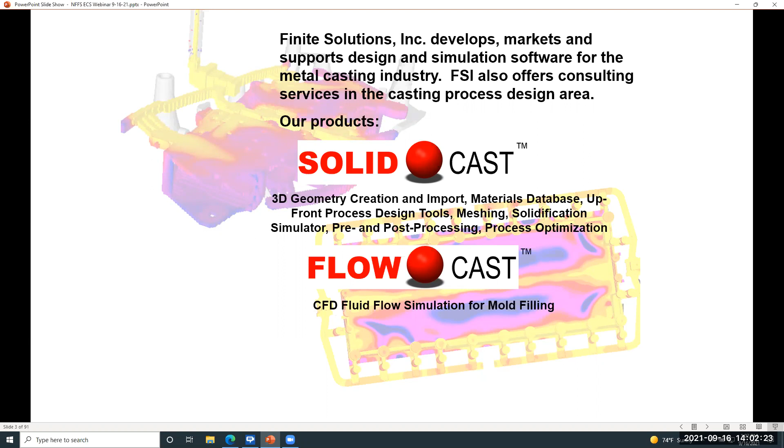Finite Solutions has been around for quite a while. Actually, we were the first company to commercially provide PC-based simulation tools. This slide shows a few of our company milestones. We started simulation in 1985. That was in the days of the MS-DOS operating system. At that time, I was employed by the American Foundrymen's Society, and Larry Smiley, who is the president of Finite Solutions, worked in the foundry industry at Reliable Castings, where he developed the world's first simulation tool.

It started as a 2D program and was expanded to 3 dimensions in 1992. And as you can see, the various dates, things moved forward. We started in 2D, moved to 3D, went from DOS to Windows, and added more and more features and capabilities, starting with solidification, adding fluid flow analysis, and then also process optimization. We continue to not only develop, but expand the use of the software. So there's many, many more features now than there were originally. And of course, with computers getting more and more powerful, the things that we can do with simulation, we didn't even dream of being able to do back in 1985.

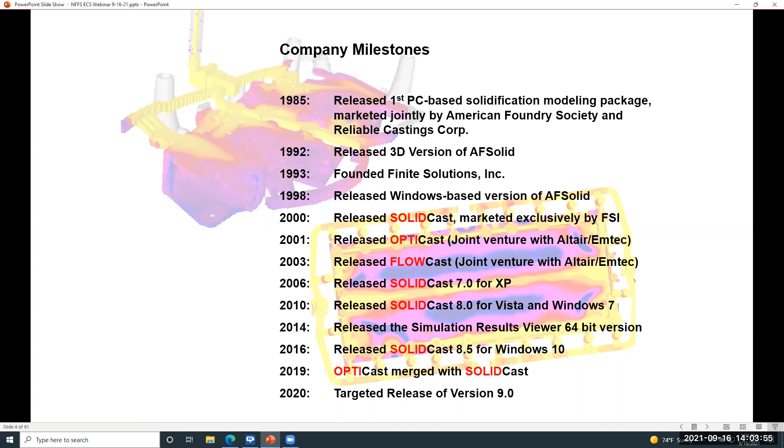There's actually 3 pieces to the software that we'll be discussing. SOLIDcast is the main module or the main system that includes model building, the databases of materials, both casting alloys and mold materials, the filling process, solidification simulation, and predictions of porosity.

FLOWcast adds true flow modeling, which is based on a tool called CFD, or computational fluid dynamics. This allows us to simulate in great detail the mold filling process and the prediction of defects related to that filling process. It also provides the most realistic and accurate temperature distribution due to filling, which in turn improves the solidification analysis. And finally, optimization is a tool that can be used to fine-tune your rigging design. Normally, this is done to obtain the maximum process yield while still guaranteeing casting quality.

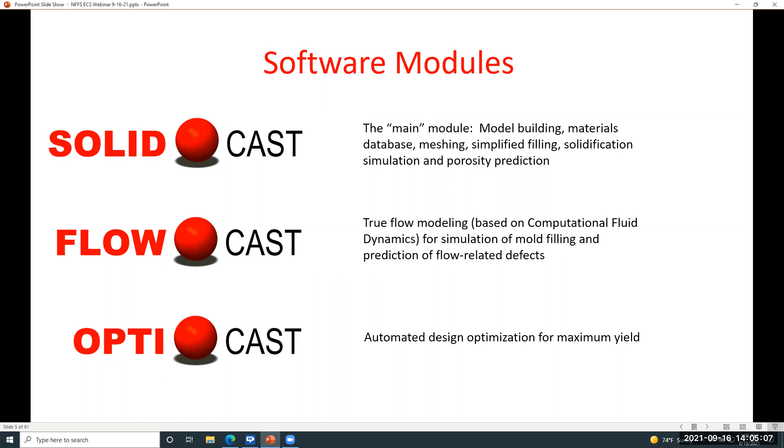When we talk about casting process design, we need to look at what the goals are. In other words, what do we want to do when we're working with process design as done by simulation? And of course, the first answer, the most obvious answer, is to make good castings. We would like to do that as efficiently as possible and as quickly as possible. Simulation is just estimating or predicting what's going to happen on the shop floor. By doing it on the computer, we are hopefully saving time, money, and doing things more reproducibly from one casting to another.

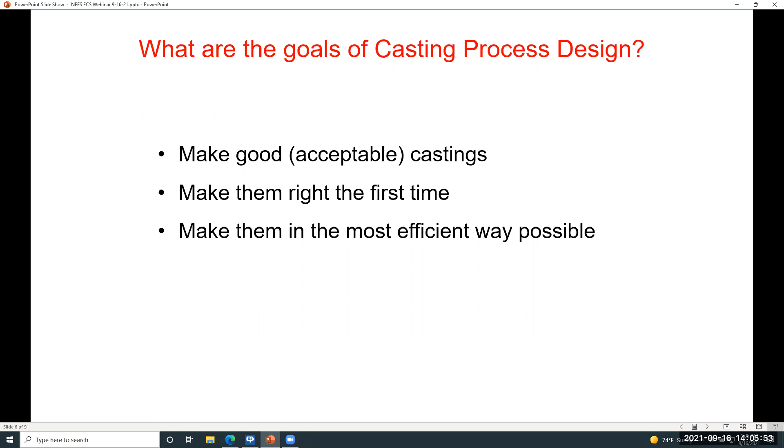When we look at process design, we can break it into 4 pieces. We can start out with the customer specifications and data. That would be things like a blueprint or a CAD model, as well as process details. We then come up with the initial design concepts. How are we going to rig this part? How are we going to gate it and riser it? The third step is verification through simulation or through shop floor trials that show that the rigging design we've come up with will work acceptably. And then finally, design optimization, where we can take that rigging system, fine tune it so that we can get the highest process yields while still guaranteeing our level of casting quality.

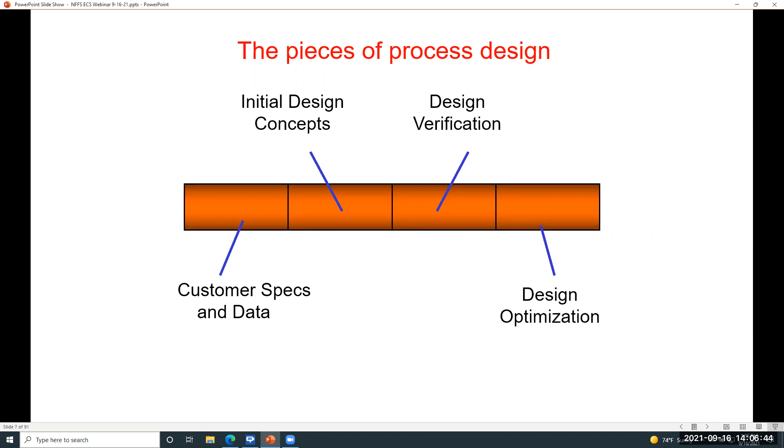Let's take a look at these pieces and see how they fit in with the software. For customer specs and data, we work with the SOLIDcast system, and this is done through a CAD import. SOLIDcast uses STL or stereolithography files, which are a very common file format that virtually any 3D CAD system today can provide directly.

The design concepts are created through the riser design wizard and the gating design wizard, which are electronic worksheets within SOLIDcast that allow us to use simulation to help us design the rigging system. That is, we run a simulation of the part without rigging, and these wizards help us to determine a good gating and risering design.

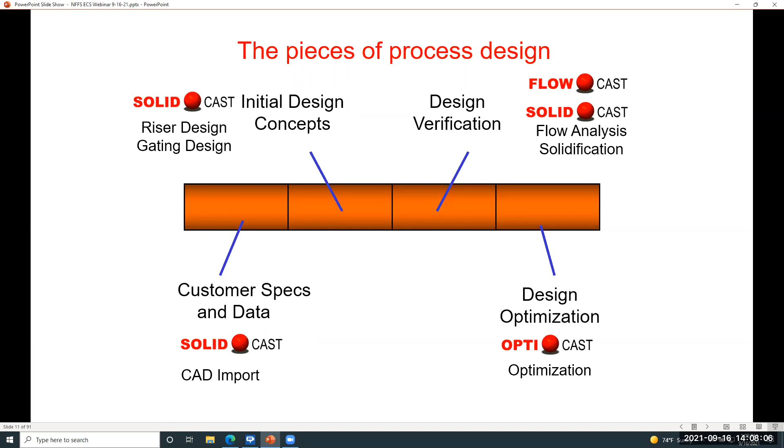Verification of that design is then done using SOLIDcast and FLOWcast so that we can do a fluid flow analysis to check the filling situation, and then SOLIDcast to do a solidification simulation to verify that we're going to make a sound casting. And then finally, optimization can be done using the OPTIcast tool. Let's look at these in a little bit more detail now.

As mentioned with SOLIDcast, the idea is that we have design tools up front so that simulation actually helps us to design a good rigging system, not simply test an existing design. And this is done, first of all, through the use of the riser design wizard, which helps us to find the appropriate location for risers, the appropriate size for the riser, and allows us to test and verify the use of these tools. For example, we could work with a sand riser, we could work with a sleeved riser. There's a lot of different options there, and the riser design wizard takes us through that process.

The traditional approach to riser design is commonly called the modulus approach or the modulus method. The modulus is simply the volume of the casting divided by the surface area. Now, that could be of the full casting, or it could be for different parts of the casting. And this was really a concept that was developed almost 100 years ago. The idea behind it was that the volume represents the heat or the energy that needs to be removed in order to get solidification to occur, and the surface area is where that heat goes.

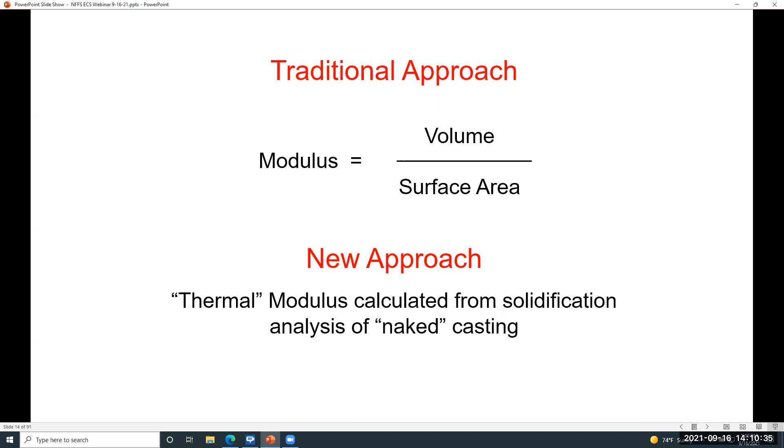However, in the computer age, we can do a lot better than that. We can calculate what we call a thermal modulus or an effective modulus, which is based on an actual solidification analysis based on the actual properties of the casting alloy and the mold materials in question. This gives us a more accurate analysis and thereby allows us to go back and do a more accurate riser design.

In the same way, we have a gating design wizard, which allows us to calculate all the pieces needed for a gating system: sprue size, runner size, gate size, and these are calculated in order to achieve what we call an optimum filling time. Again, that is calculated by the system, and we can make choices, and the system will go through and calculate appropriate sizes of all the components of the gating system.

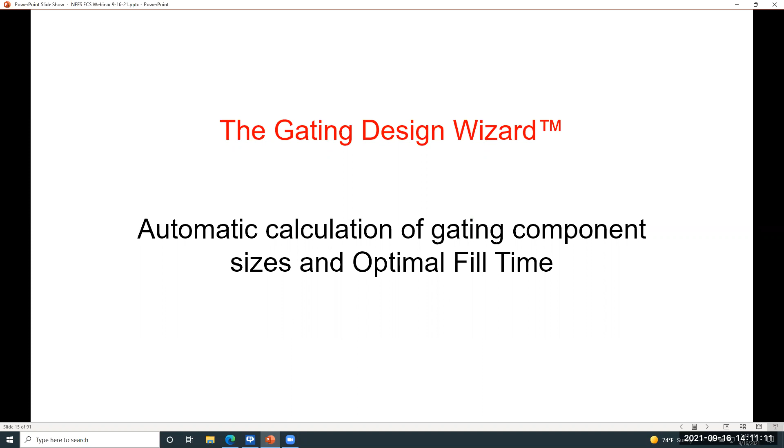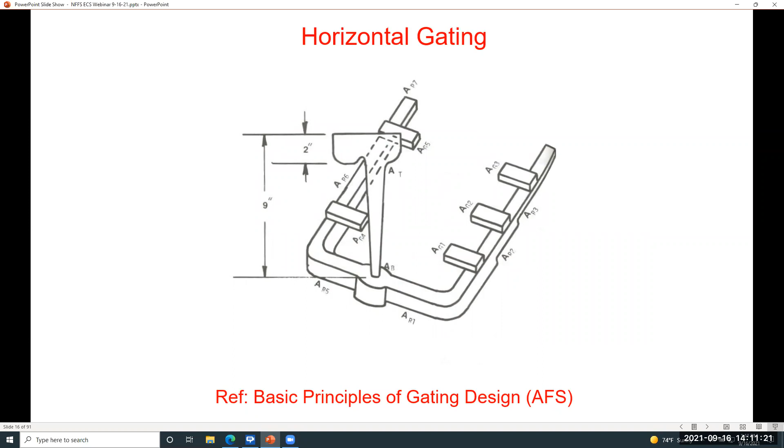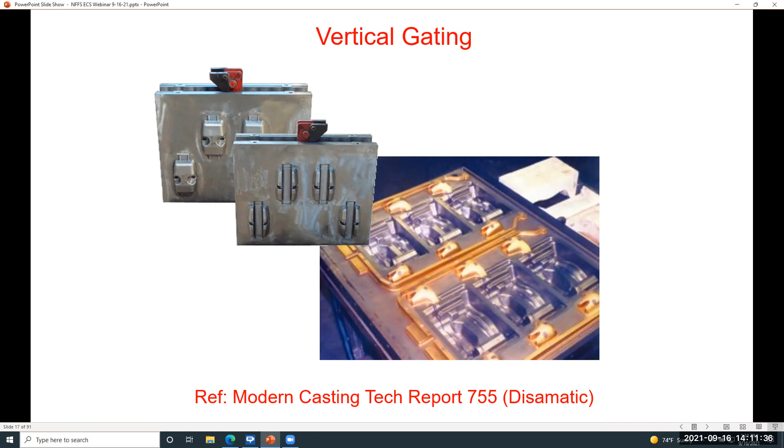We can work with horizontally parted molds, and this is a schematic taken from the AFS book, Principles of Gating Design. And we can also work with vertically parted molds, such as you'd have on a DISAMATIC molding machine. Incidentally, a lot of the principles for gating and riser design can be applied to the investment casting process and the permanent mold process as well.

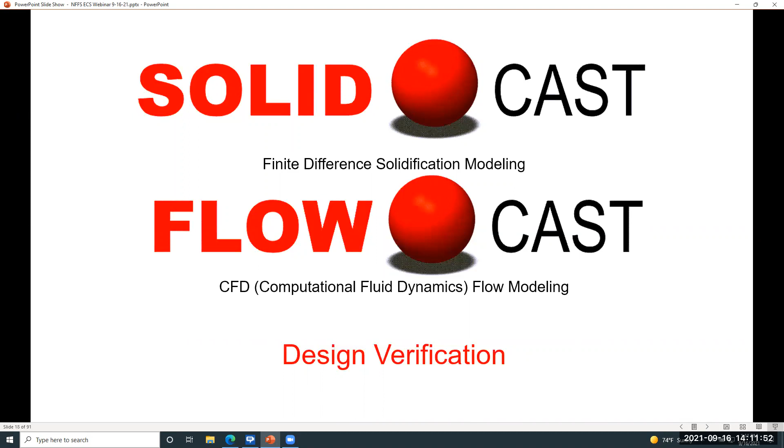So once we've designed our system using the wizards, we can then use SOLIDcast and FLOWcast to verify or to test that design. And then finally, if we wish, we can optimize that design, fine-tuning it to get the highest yield possible.

Let's now look at the actual steps in simulation. We start off with materials. What's our casting alloy? What's our mold material? What is our molding methodology? That is, are we doing sand casting? Are we doing investment casting or permanent mold casting? In each of these situations, we have different ways to set up a simulation to accurately model the system.

The second step is to create a three-dimensional model. Generally, the simplest way to do this is to get a CAD file from your customer. Again, our initial simulation will be without rigging, so model building normally only takes a few seconds. That is, import an STL file, tell the system what the alloy is and what the mold material is, and go on to do the simulation.

Of course, when we add things to that model, the rigging, the risering, the gating, perhaps the use of chills or other materials, those can be created either in CAD or in many cases can be done within SOLIDcast as well.

The simulation itself is not actually run on a CAD model. It's run on what we call a mesh. In SOLIDcast, we break the model down into a series of cubes, which we call nodes. And this may be a few 100,000 cubes to many millions of nodes, depending on the size of the model and the complexity of the shapes. The meshing process is done in an automatic fashion. We set a few parameters and the meshing takes place automatically.

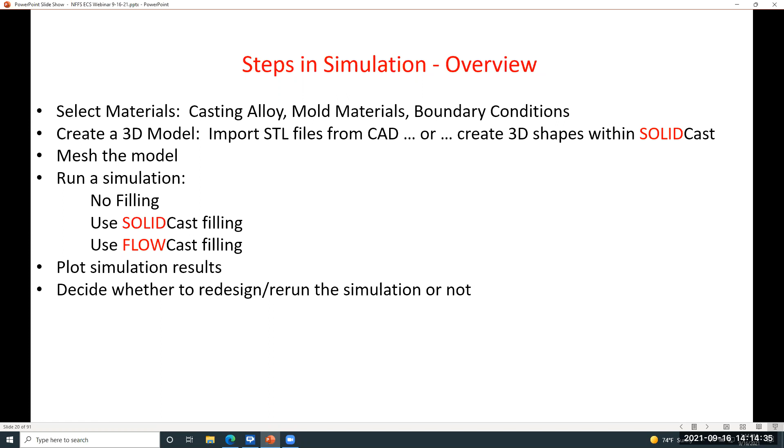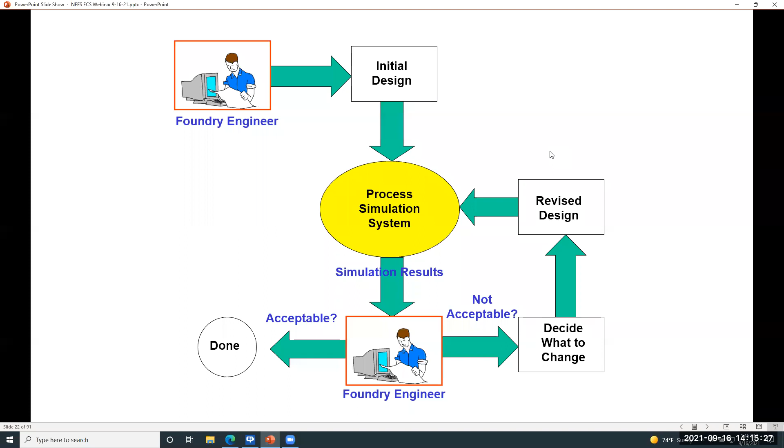The current way we do this, or the manual way we work at this process, is shown in this schematic. We start with the foundry engineer who looks at drawings or CAD files, comes up with an initial design, and then we run that through simulation to see did we make a good casting or not. If we look down at the bottom of the screen, then we can see that once again, the foundry engineer is involved deciding whether things are good or bad. If things are not acceptable, decisions are made on what to change, adjust or revise the design, and then resubmit that to process simulation. Now, this loop may be gone through several times before we get what we would call an acceptable result.

However, we are trying to develop a new paradigm where we can do a lot more in a lot less time. And that is by using the system to help us with the decision-making process. We start with the foundry engineer once again, but in this case, the initial design is run automatically by the system, and then gating and riser design wizards are used to help us with that initial design of the rigging system. That is then submitted to simulation, and now we can either use the foundry engineer to determine whether things are good or not, or we can insert optimization into the process, where the system can automatically determine, was the result of that simulation acceptable, and also to determine what should be changed.

And essentially, it automates this bottom process. So there may be many simulations done, but an operator is not involved once the optimization is begun. And we'll see in a minute how that is done. That allows us to improve our results. Typically, we can get yield improvements in the order of anywhere from, say, 5 to 15%, and yet have less time involved with the simulation process itself.

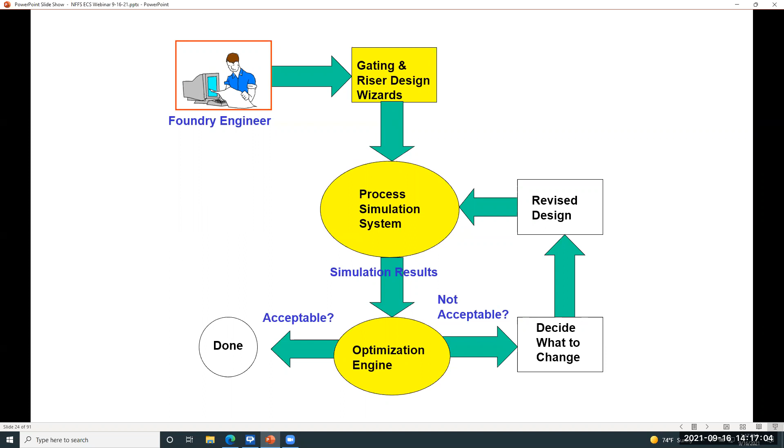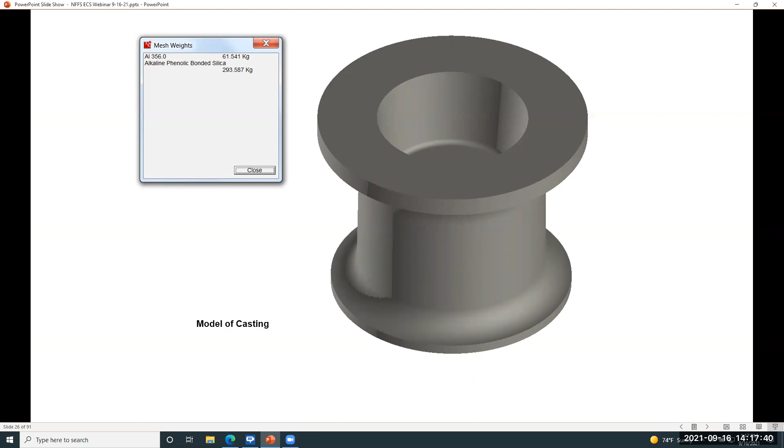When we run a simulation, we tell the software, what is our casting alloy? That is simply selecting the material out of a database. And what is our mold material? Again, typically we're just selecting the material out of the database. In the case of sand castings, we can have various binder processes. So we could have, say, a green sand mold, we could have a phenolic urethane binder, any number of things there. And we pull that data just by checking an entry on a box in the database. In the case of the casting material, we're normally adjusting the pouring temperature for the particular process we're working with as well.

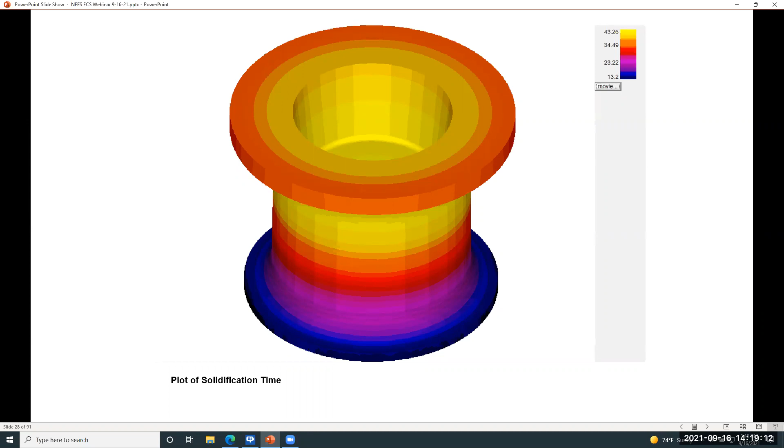Setting up and running this initial simulation normally only takes a minute or two, and running of the simulation itself, depending on what PC you have and the complexity of the model, typically only takes from say 2 or 3 minutes to approximately an hour for a very complex model. This shows a plot of the solidification time, where basically we're looking at the darker colors representing the faster solidification times and the brighter colors, the longer times.

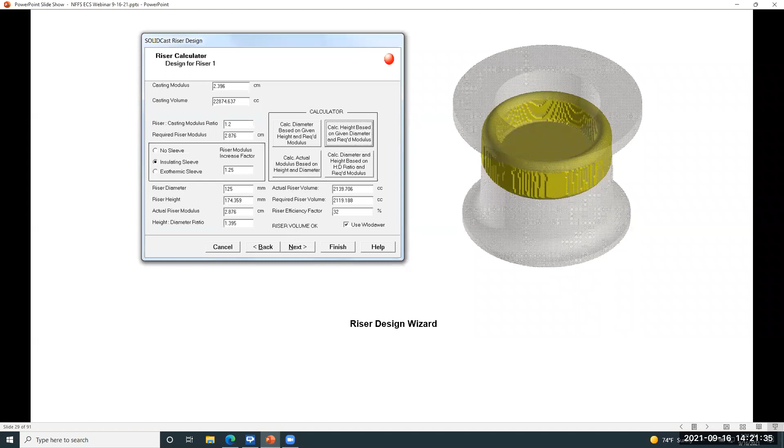So we can calculate the diameter of the riser, the height of the riser, and make sure that the modulus information is greater than the casting modulus, and then our volume information is adequate as well. If any one of these pieces is not satisfied, it will be flagged in the screen, and then you can very quickly go back and make adjustments to see what changes need to be made in order to get an appropriate size riser.

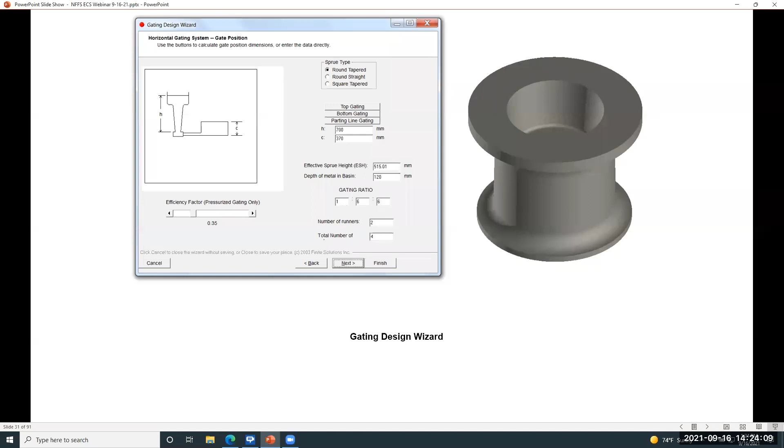We can enter a gating ratio, which is the ratio of the cross-sectional area of the sprue to the runner to the gates. So in this case, we have a 1:6:6 ratio, the sprue being the smallest number. This is what we call an expanding or a non-pressurized system. And then we can set the number of runners and the total number of gates. The system then goes through and calculates all the appropriate dimensions for the sprue, for the runner, and the gates.

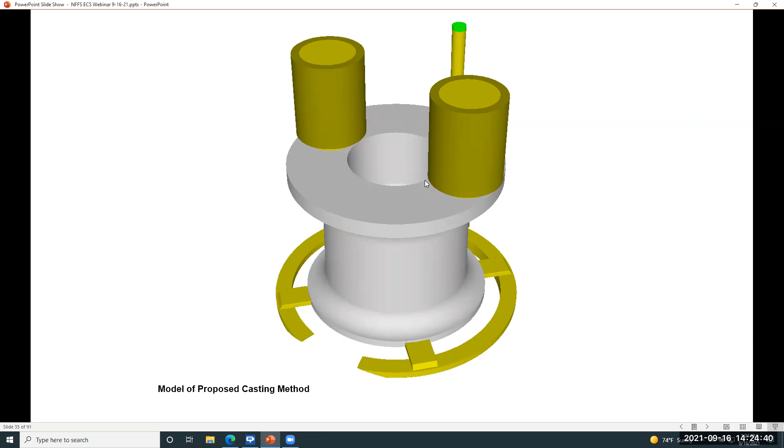This shows what the gating and risering system looks like based on those calculations. We can see that we have top risers here with insulating sleeves. We can see that we have a round tapered sprue. We have a double runner. Incidentally, when we look at the runner, we can see that this is what's known as a step-down runner, which allows equal flow through each gate. You can see after the first gate, the thickness of the runner is reduced. That's so that we maintain a constant cross-sectional area and a constant flow rate through each individual piece of the gating system.

Also notice that we have a green disc on the top of the sprue. That's called fill material. That allows us to run a filling simulation that essentially becomes the source of hot metal into the system. And also, we have a filter down here. SOLIDcast has a utility that will allow you to create ceramic filters. And we actually modeled the flow down the sprue, through the filter, and through the gating system.

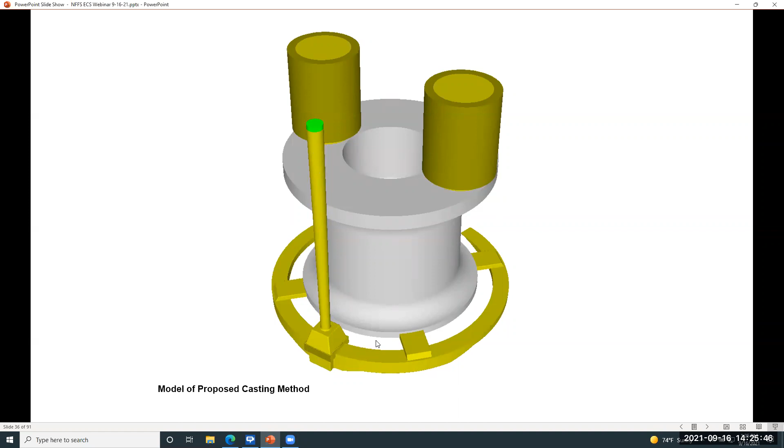This just shows another angled view. And this also shows that we'll be using a chill on the base in the center of the casting. The reason for this is with our initial simulation, we found that we could not get good feeding continuously through from the top riser down into the bottom part of the casting. So we used a chill to freeze off that area quickly and promote directional solidification.

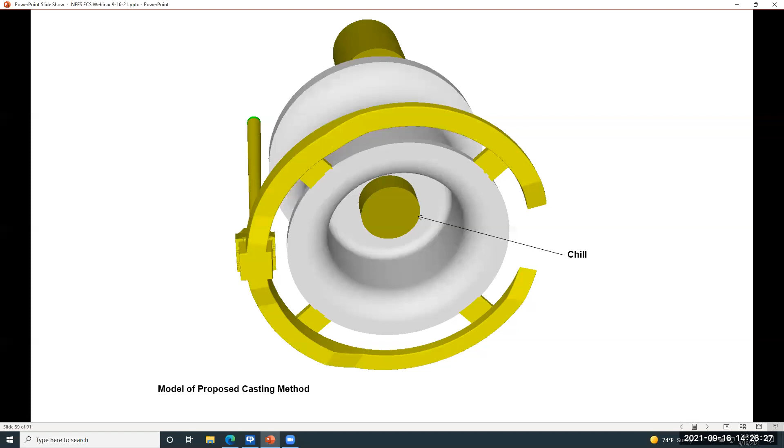Just another view. And here we're going to see a couple of screenshots showing the filling process. This shows a 20% increment. We're looking at the temperatures that are changing during the filling process. And if we broke it down and created a movie, we would be able to see the entire filling process in a smooth, real-time sort of fashion, so that we could see if there's any splashing or formation of areas where gas would be trapped, things like that.

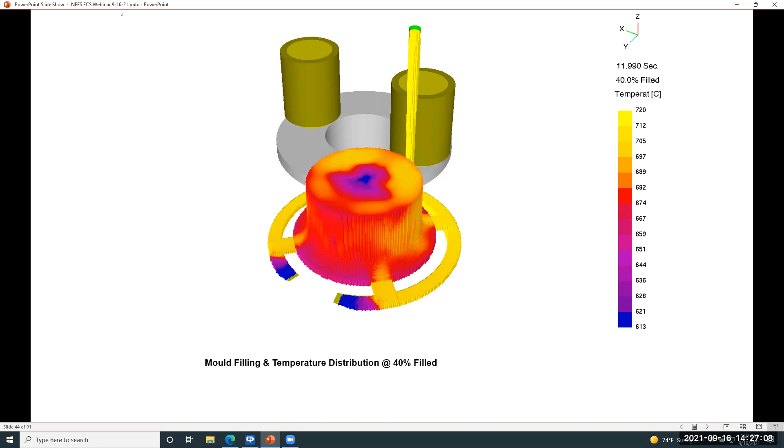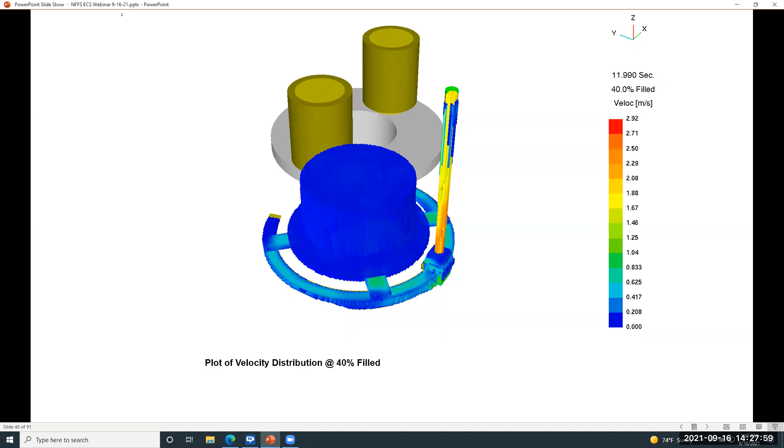Incidentally, when a filling simulation is being done, we can look at the temperatures, we can look at metal velocity, we can also look at pressures. And so this just shows steps through the filling process. This shows metal velocity. We're looking at getting flow of metal in as calmly as possible, especially in the non-ferrous alloys, because they tend to be prone to dross formation and getting oxide mixed up. So we're looking here, we're getting nice, slow metal velocities. So our lower values, the dark and medium blues.

And in this case, we were doing a plot of anywhere where the metal was going faster than 0.5 meters per second. And this is sort of a typical cutoff value. We would like to keep the metal velocities below that, and we can see that we're doing that quite well here. The only area where it's going faster than that is the initial metal down into the sprue.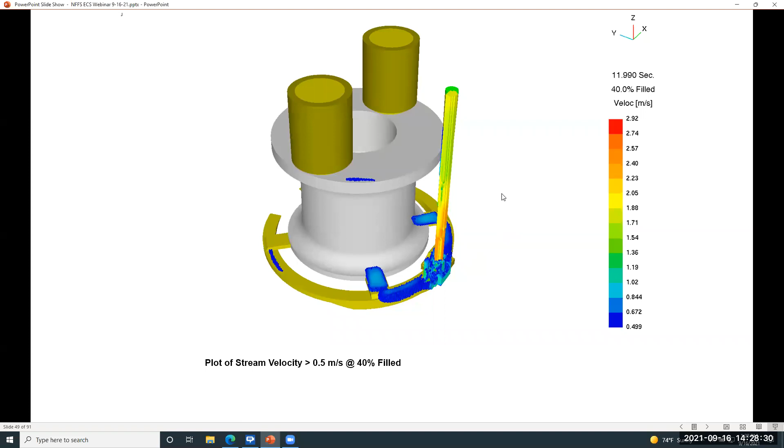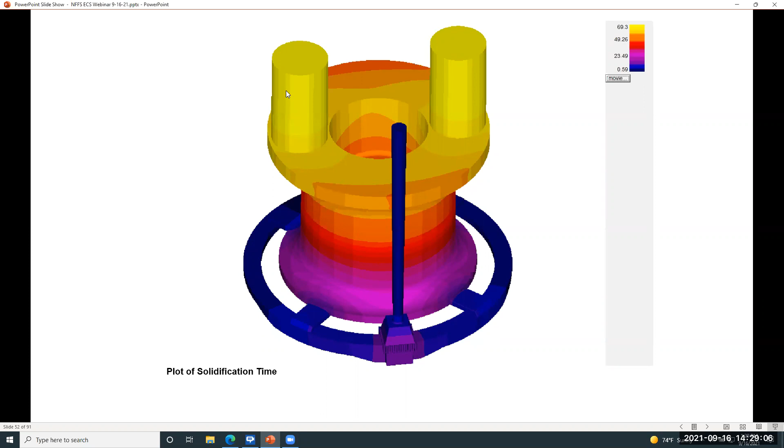If we look at solidification, this is a plot of the temperature distribution at the end of solidification. And this is a plot of solidification time. Generally speaking, we're looking for directional solidification, where we want to see different parts of the casting solidifying in a progression of darker to brighter. And we want to go out so that the last point to solidify is in the riser. That appears to be the case here.

Here we're plotting at 0.95, so it's a higher sensitivity. Anything is shown that has lost more than 5% of its nominal density. 0.99, this is 1%. We can see we're getting a little indication here at the gate connections. And then finally, at a value of 1, this is our highest level of sensitivity. In other words, any loss of metal density will be indicated in the plot.

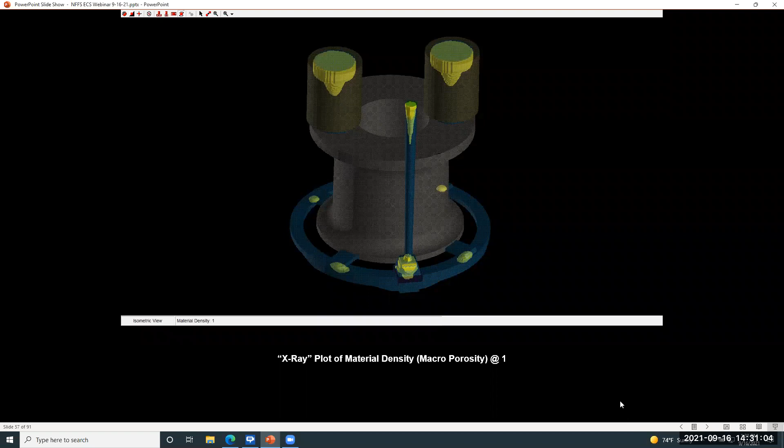So we can see that we have more indications in the sprue. We can see better the piping of the risers, but we can also see that the casting is completely clean. And in fact, if we go from a side view here and rotate the casting so that the sprue and the gating are out of the way, we can see that we have a perfectly sound casting.

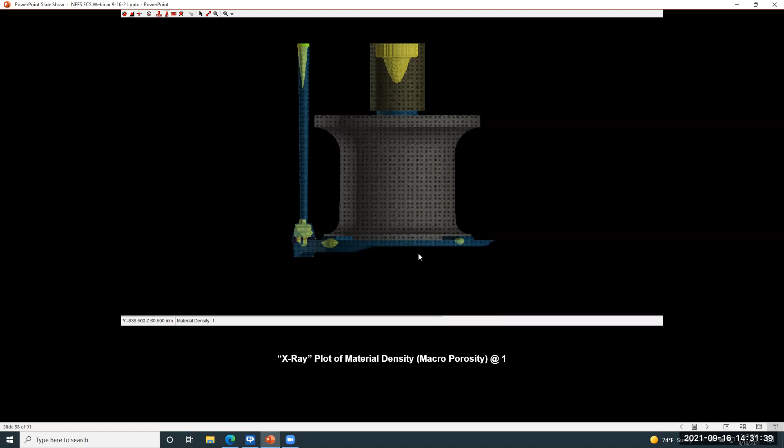So by doing an initial simulation with SOLIDcast, we were able to determine the basic solidification behavior of the part. We were able to calculate appropriate size risering, appropriate size gating, and then by adding those to the model and running a verification simulation, we can see that we're getting a perfectly sound casting first time through, which of course is what we're hoping for. This is just another view from the top.

Just a couple of things showing here. I mentioned after running a first simulation, we weren't getting good feeding all the way through. In other words, the feeding zone was separating out. This shows an example of what I would call an intermediate model. That is, we're not showing an entire gating system, but what we're doing is we're adding the in-gate locations and making them out of fill material. By doing this, we can put hot metal in here without doing a rigorous filling simulation.

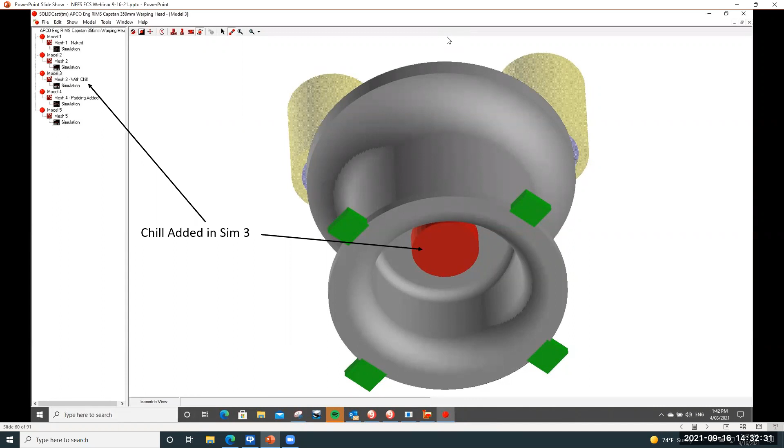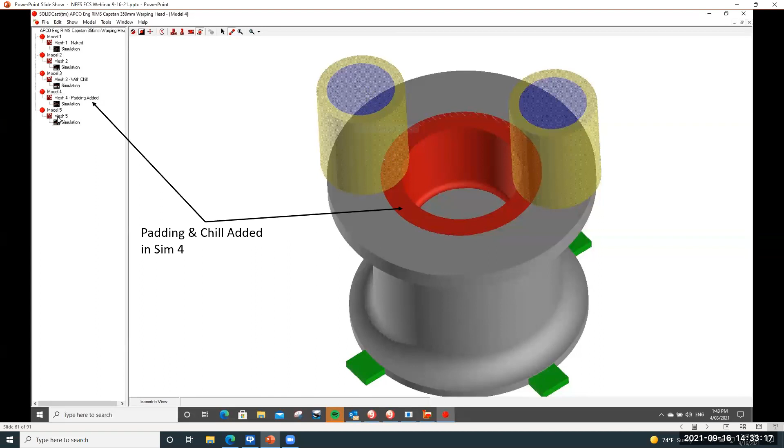That saves us time, but it also gives us a good idea of what's happening with the filling process or the effects of the filling process. After putting in that chill, we still weren't getting complete progression of solidification through. So we actually made an adjustment to the casting geometry by adding a circular pad on the inside, again, doing simplified filling. And we were able to then verify that the risers could then feed through and completely feed the casting.

And then finally, our final simulation, or simulation number 5, that was done with the entire gating system and also done using what's known as a plane of symmetry. You can see here that the casting itself is radially symmetric, but when we add risering and gating, we have a plane of symmetry or a mirror image right down the middle.

The reason we do that in simulation is that allows us to run a simulation twice as fast, yet give us results that are exact. There's no loss of accuracy from this at all. And so if we're lucky enough to have a part where we have symmetry involved, that will allow us to run our simulation that much quicker.

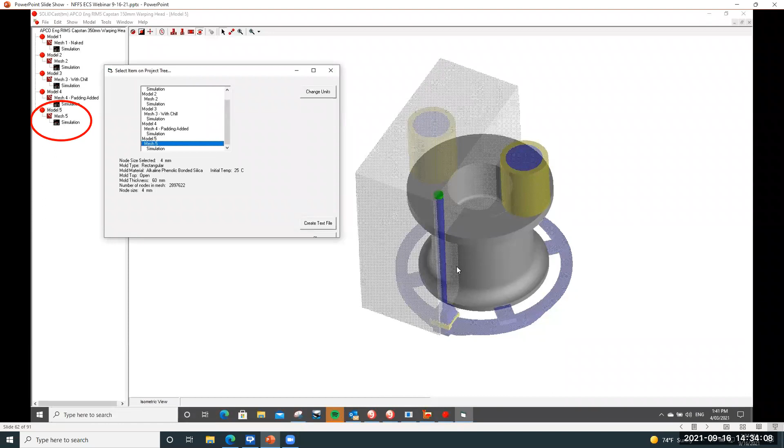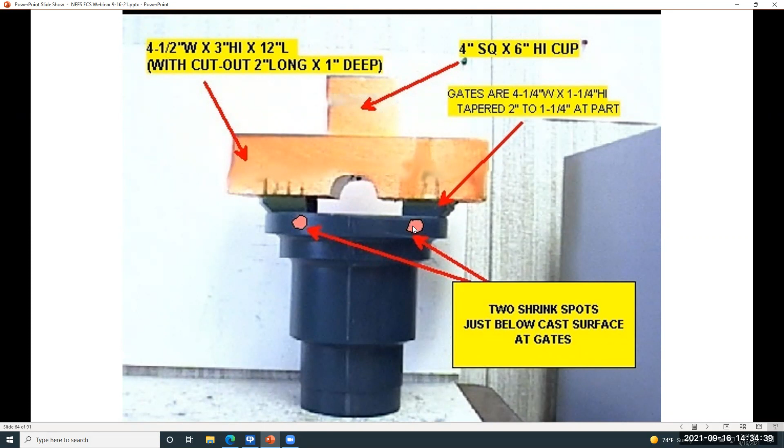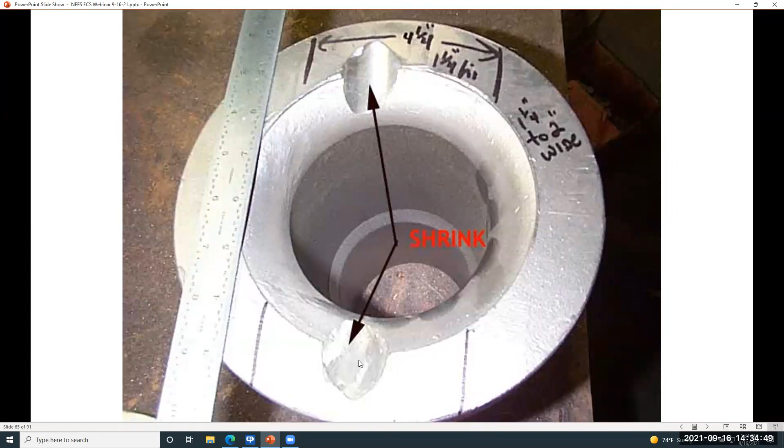Let's take another example, very quick look at adding the idea of optimization to the process. This will be done for an investment casting. This shows the wax pattern, and you can see initially that one of the problems that they were having at the foundry was that they were getting internal shrinkage in the casting below the in-gate. So they were actually gouging out so that you can see the shrink area below the in-gates here.

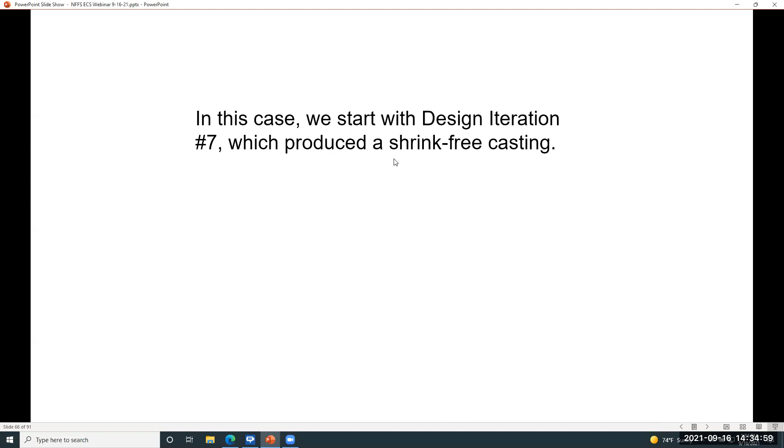Initial simulation was done to make adjustments trying to move that shrinkage out into the gating system. And that was actually done by putting a little wedge underneath the gate to open up the area through there. So this became our starting point, and then added the current gating system into the model so that we can do an optimization. And we can see a couple of things here. We have the casting geometry, the gating system in blue, and fill material at the top in the green. So we're doing a filling simulation with this as well.

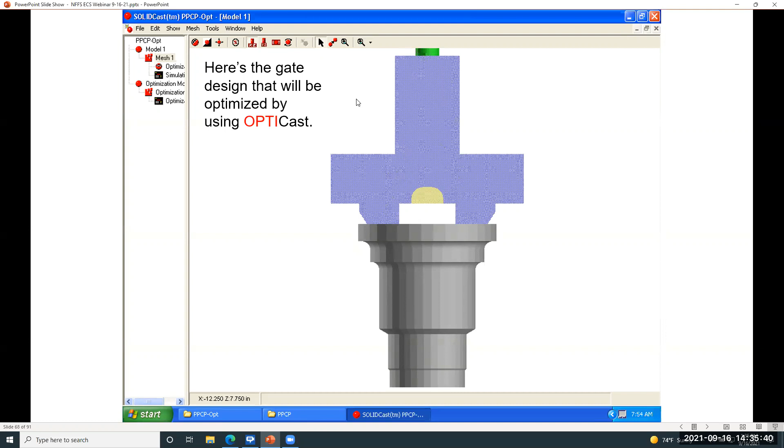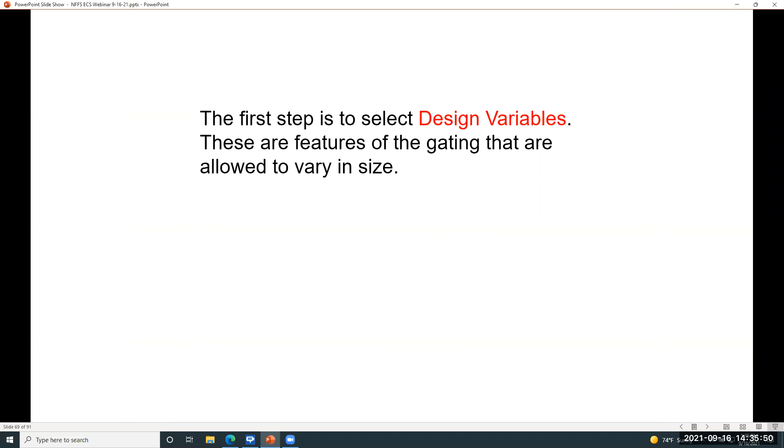When we're putting together an optimization, we need to tell the system what things will vary, what things will change. That is, what features of the gating system. In this case, we have a horizontal feeder bar that will vary. We have a pouring cup, and we have the in-gates. Now, with each variable, we have some adjustments we can make. We can say, how much bigger, how much smaller can it get? Are there things that are not allowed to change?

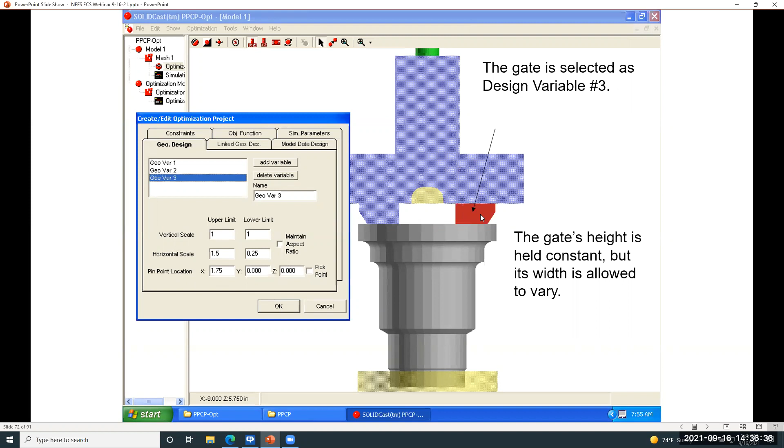For example, here, we don't want the gate height to change because that would pull the casting away from the rest of the gating system. So we're fixing that height. We also have what's known as a pinpoint location. That is, where in space is this variable going to be fixed? We're going to link the left gate to the right gate.

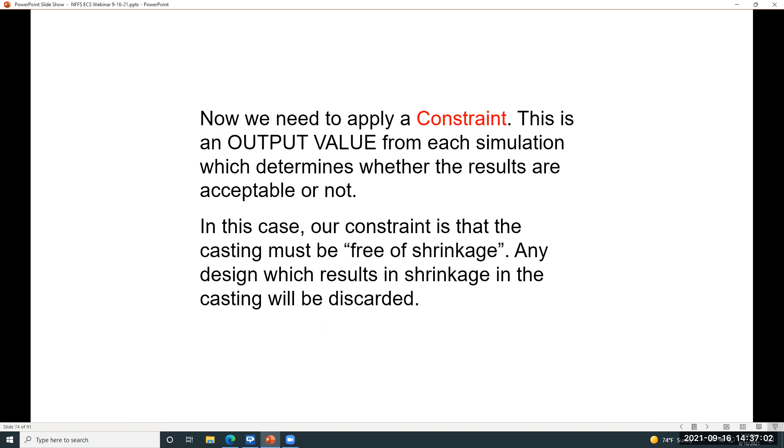Once we have told the system what variables we have, we need to tell it what constraints we have. In other words, how does the system determine good from bad? Well, in this case, we want the casting to be shrinkage free. So we say we want a minimum material density of 1. 1 is a perfectly sound or no loss of density whatsoever. As you can see, we can have a number of constraints depending on what we're looking for in a particular model. The most common thing, however, would be a shrink-free casting, which would be a material density of 1.

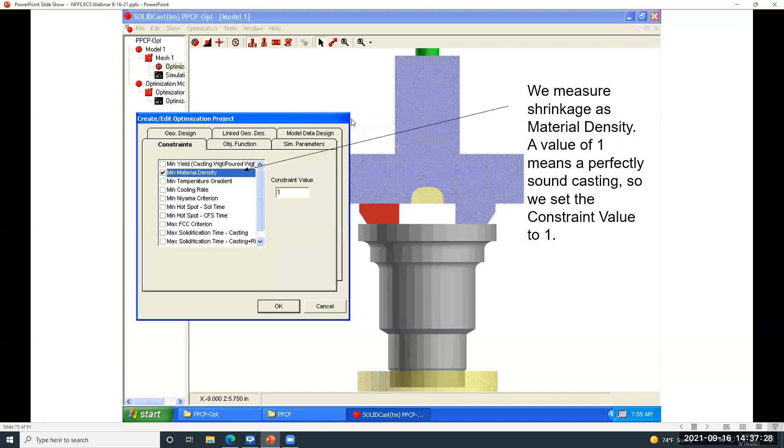And finally, we need an objective. That is, what are we trying to do through this optimization? Most frequently, that will be maximize the yield. In other words, get the smallest pouring weight that will give us a sound casting.

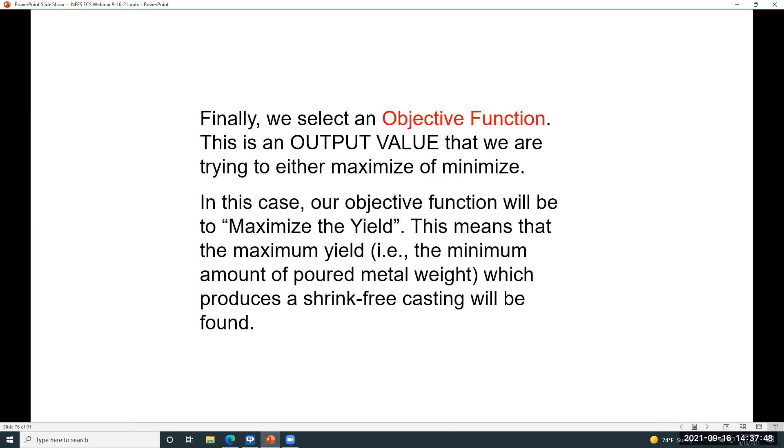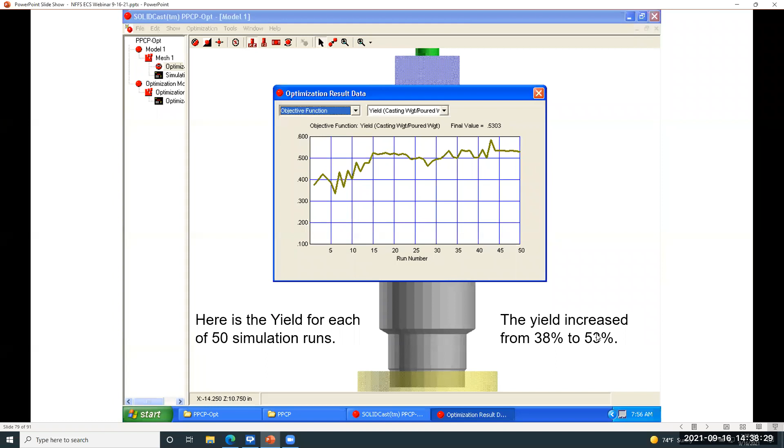Once we've set that up, the system runs on its own. And in this particular example, it actually ran 50 simulations. So originally when this happened, that was an overnight run. This was an example we did a number of years ago. With today's computer, you could probably do those same 50 simulations in a couple of hours. This shows the summary. The initial situation, we had a process yield of about 38%. The final yield was 53%. So we had approximately a 15% improvement in yield.

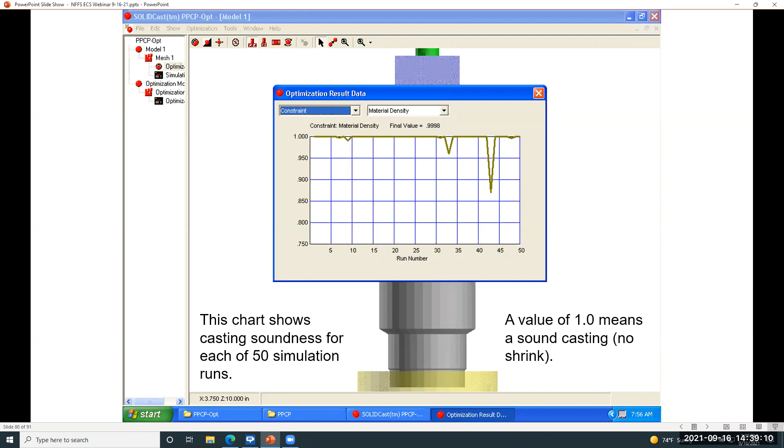This shows a chart of how the soundness varied. That is the shrink factor through those. Our final value comes out with a value of 0.9998, which actually is not our value of 1. But when we're doing optimization, we can allow what I call wiggle room. It's called a percentage of a constraint violation. We allowed it to vary up to 0.05%, and that would still be acceptable, and we're well within that range.

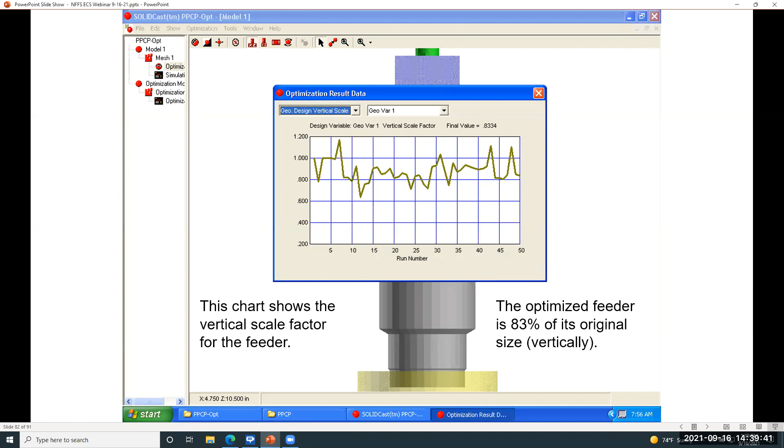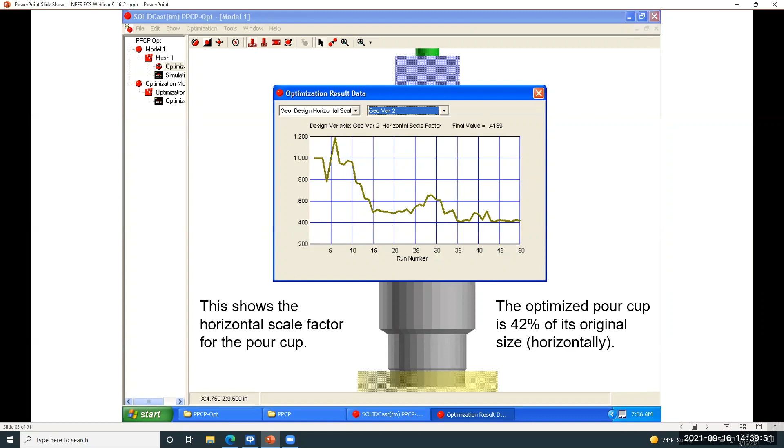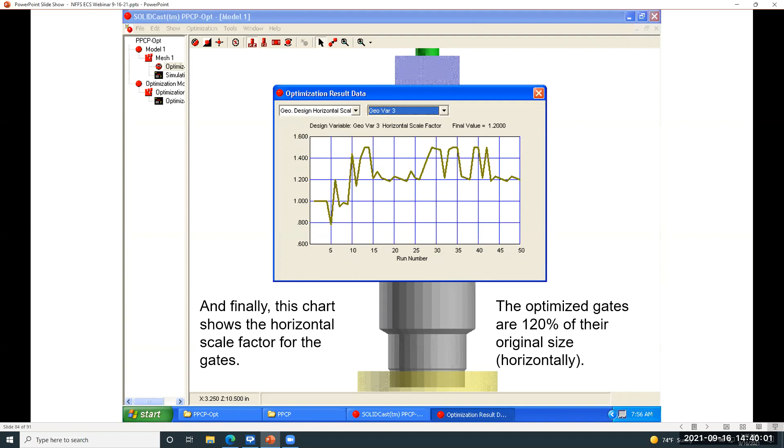This shows how the feeder bar changed in size. It was originally at a value of 1. It dropped down to 82% of its original size. And for the feeder bar, the height dropped to 83%, so about the same each way. The pouring cup, the size of that dropped down to about 42% of its original size, so that decreased quite a bit. And the gate actually got a little bit bigger, and that was in order to promote directional solidification.

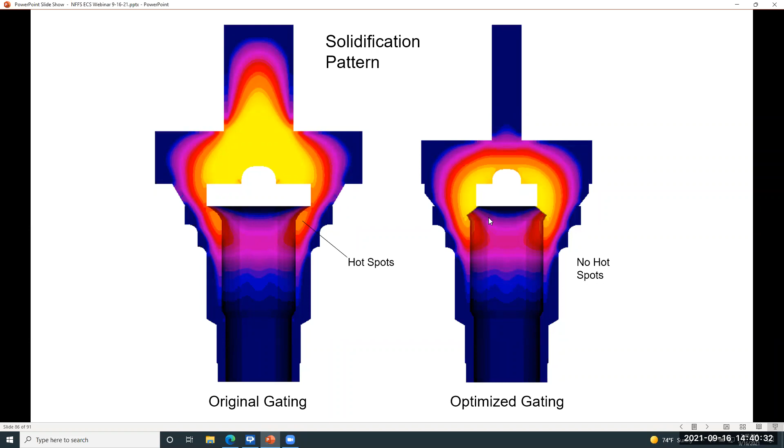Let's look at a comparison. These are slices through the two models showing the solidification pattern. This shows the initial area where we were getting shrinkage or a hot spot inside the casting. This shows the change where that was pulled up out of the casting and out into the feeding system. Here's our shrinkage predictions. Originally, we had shrinkage in the casting. And finally, there's no shrinkage in the casting, and our yield is 15% greater at the same time. So we've been able to get a great improvement while improving casting quality at the same time.

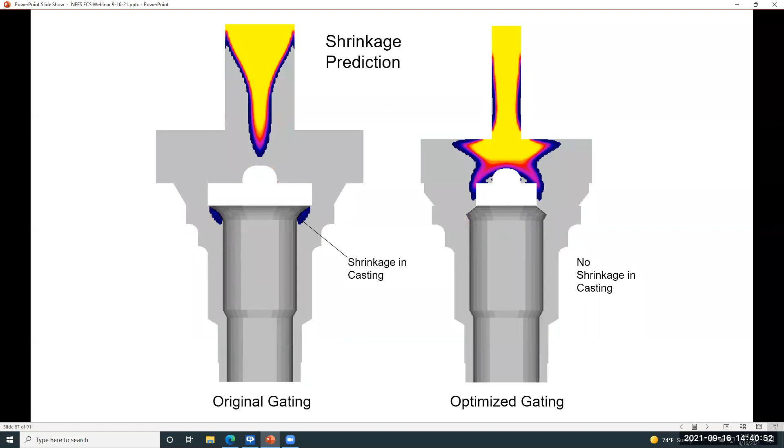This shows what the rigging systems would look like. And the result with that 15% improvement eliminated shrinkage from the casting, and with the production quantities that saved the foundry about $17,000 a year in this part alone.

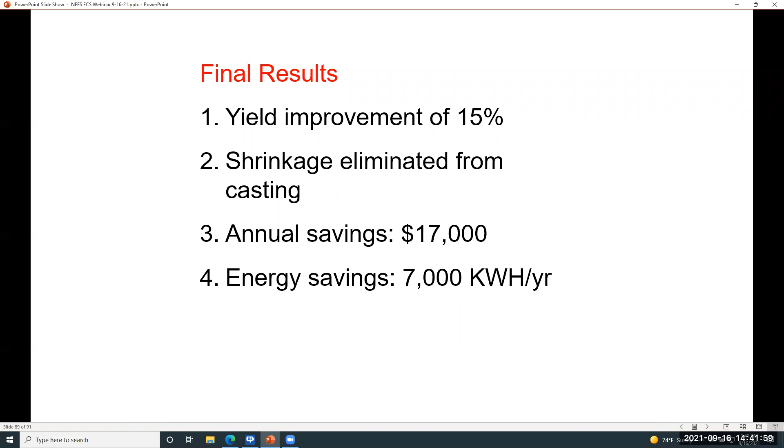So those are two examples of how this system can be used, one for sand casting, one for investment casting and adding an optimization. The permanent mold process is a bit more complicated, but we have many tools that allow you to set that up and run permanent mold simulations. We don't have time in this short webinar to go over that, but if there's anyone who is interested in seeing a case study or two of the permanent mold process, you can just let me know and I'll be happy to send a similar sort of thing to what we see here that you can look at your leisure.

So one of the questions is, what would be the member benefits of using simulation? Of course, anybody can benefit from that, whether they're a member of the Non-Ferrous Founders Society or not. But the question is, what benefit could you get directly by working with simulation as an NFFS member? Well, money savings is the basic thing. Essentially, what we would do is we would treat you as a group.